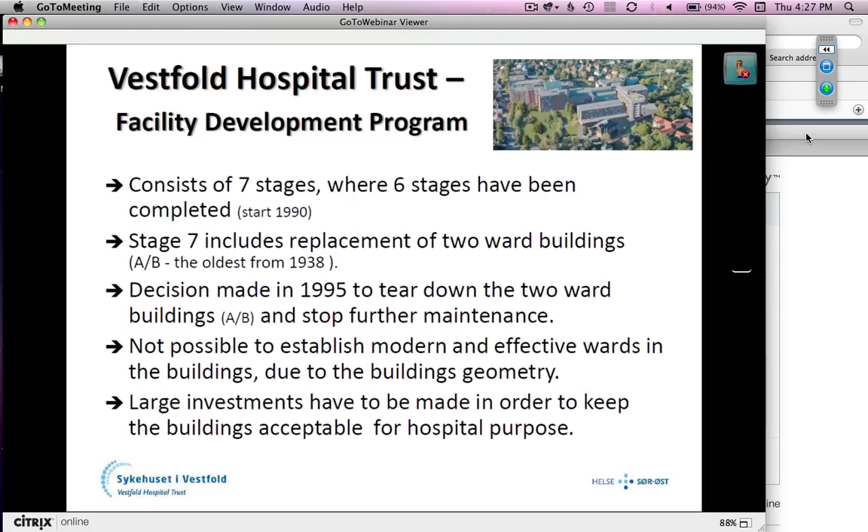A decision was made in 1995 to tear down the 2 ward buildings and stop further maintenance. It was not possible to establish modern and effective wards in the buildings due to the building geometry. Large investments would have to be made in order to keep the buildings acceptable for hospital purposes.

Here you can see the 2 buildings, which are our greatest concern at the moment. Building A was built in 1972 and Building B in 1938. Building A was built as a temporary building intended to last for about 10 years. Very poor quality.

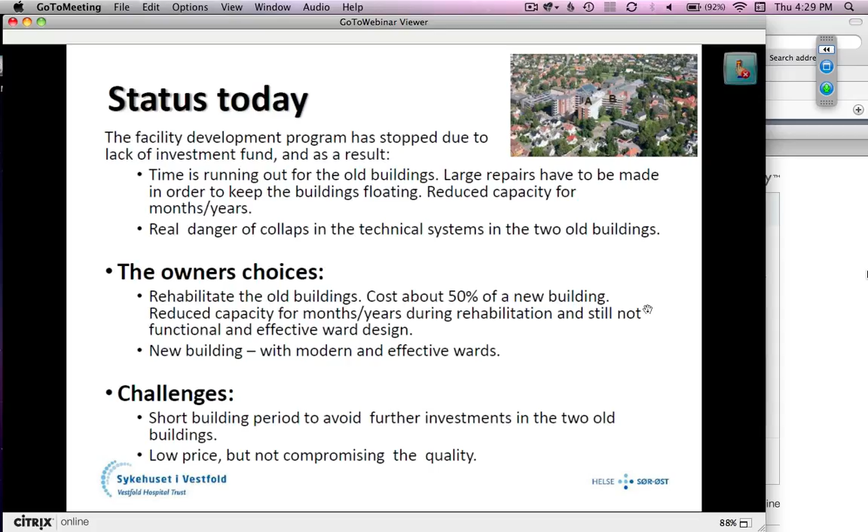Development of the hospital site has gone on for a long time, but the board of Vestfold Hospital Trust decided in June this year to divide the 7th building stage into 2 parts, where the first part shall cover the capacity of the A and B buildings. That's about 200 beds in those 2 buildings, and the board wants a solution by October this year, with the new building finished in 2013.

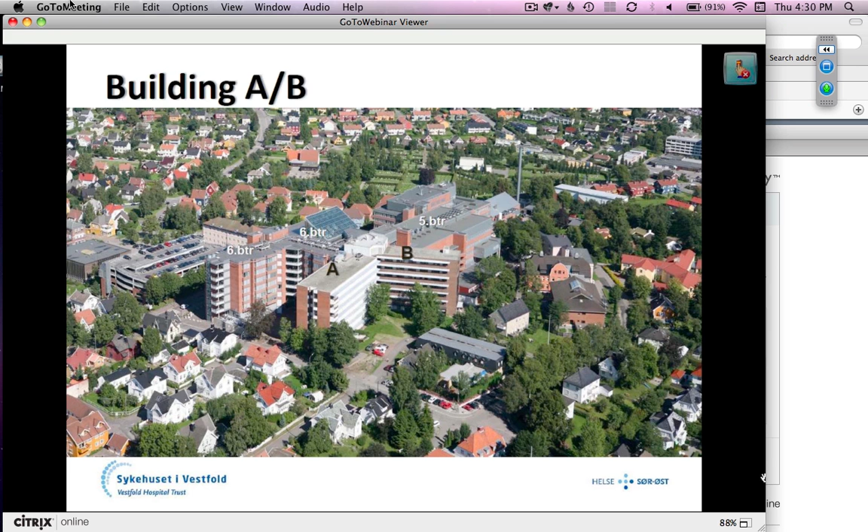This is a big challenge for us in my organization. It's an exceptionally short time to come up with a new project. We haven't got the time to involve the hospital staff in the work, and we must rely on the work done earlier in development of stage 7, and on an experienced project organization and an experienced architect.

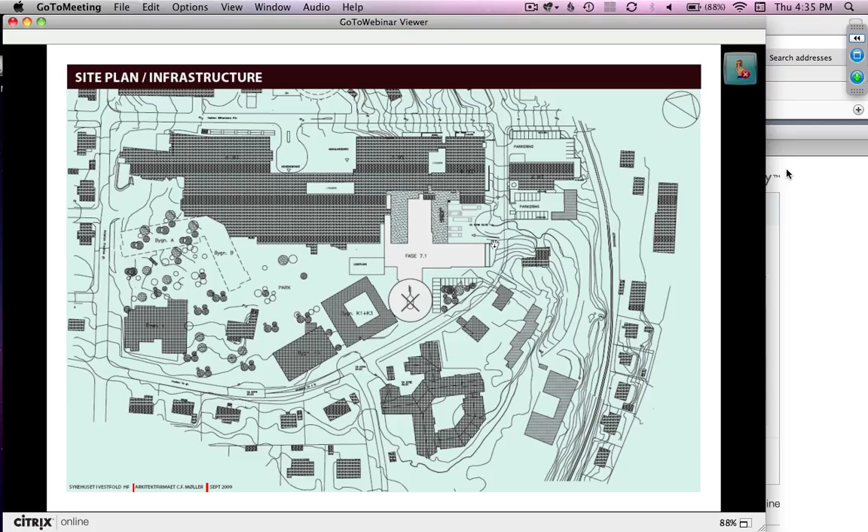So it's quite a complex situation, with a lot of surrounding buildings. And there's some loading bays and important logistics parts for the rest of the hospital that should remain operational during the construction phase.

So the way we've been working is that we've tried to make this building defined by some standard elements. Because if we can utilize standard elements, we can decrease the cost of the project, which is important for the client. So we want to achieve a high degree of standardization.

At the same time we're doing these sketches, we also make a 3D model, an IFC-based model of the same concept. And we sent that to Lars and Kimon so that they could use it as part of the Build Hospital Live event.

So we had 3 wings, the A, B, and C wings, and they're sort of interchangeable, providing a high degree of flexibility. And in sum it's 250 beds.

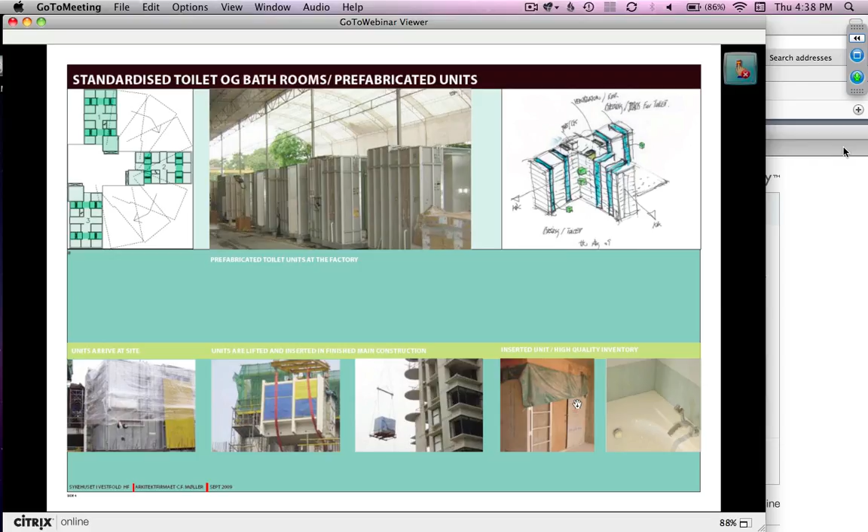Here we have made some sketches to illustrate the technical principles in this building, because the technical system is actually a key part of solving the design challenge. We have the bathroom cores, and we have some shafts where we route all the technical systems.

We have a technical subfloor, and we also have a technical floor at the top of the building. And we have the shafts, the technical shafts, as I point out. So this is the basic principle we try to deploy, and as you can see, we are trying to drive towards a very high level of standardization.

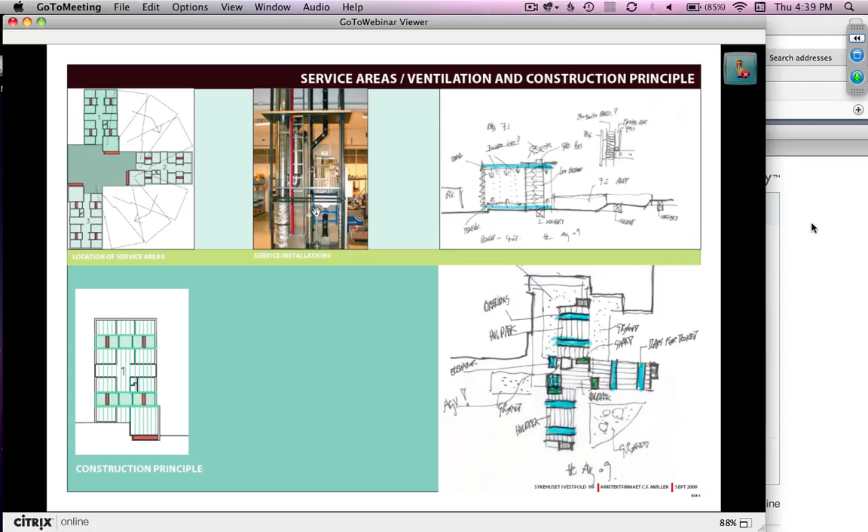When we create standard elements, it's of course important that they don't just become rigid, because we want to achieve a degree of flexibility. So the way we do that is we have a standard wing, which has a single patient and a triple patient room. So the bathroom or toilet cores are not touched, but the other parts are actually quite flexible.

And of course we have different kinds of isolation, both airborne and directly transferable, so that complicates things. This patient triple room can be refurbished or changed into another function because it's close to the shaft. We also have some pre-rooms, anti-rooms, which make us able to create isolation posts for patients, or patient isolation rooms.

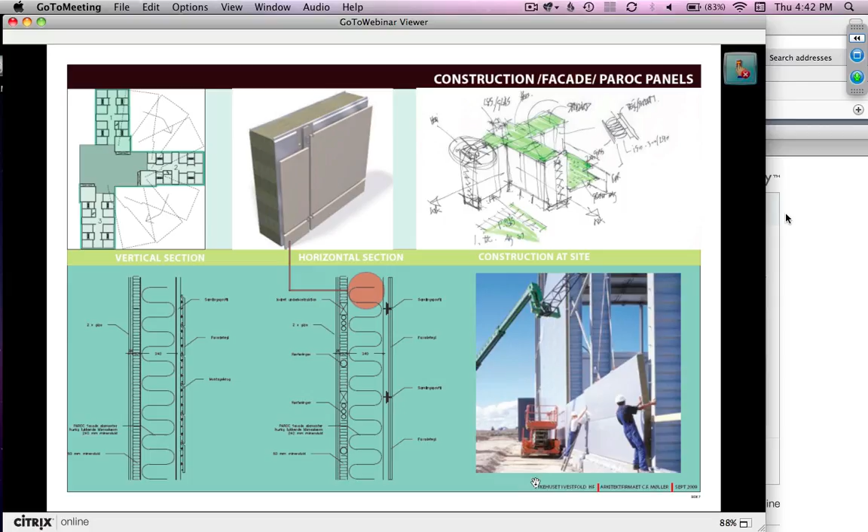And to close off the presentation, this is an example of how the final facade will look. So the existing building is brick, and we try to link to that with a new facade material. And we use some baquette tiles on this system wall, which is shielding the facade and ventilating part of it.

And this is sort of the final view of the building with the facade in place. In the further development of the project, we need to work more with the colors in the facade.

With what I've now explained, we think that we have a good angle of attack, which will reduce the cost and also the construction time for our client. And by bringing the project forward in regard to modeling, we also had the basis for doing a quick cost estimate on the project, which may be important.

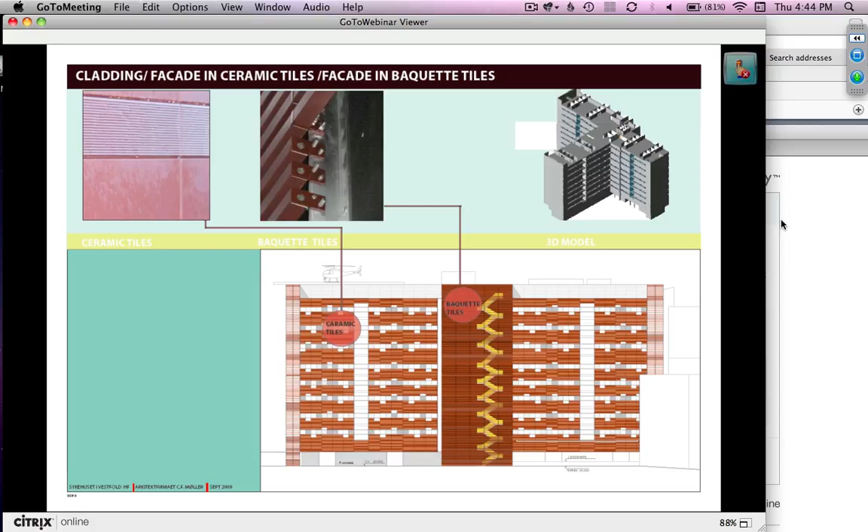Processes to be aware of, so I need to be here and there. Can you hear me? Okay.

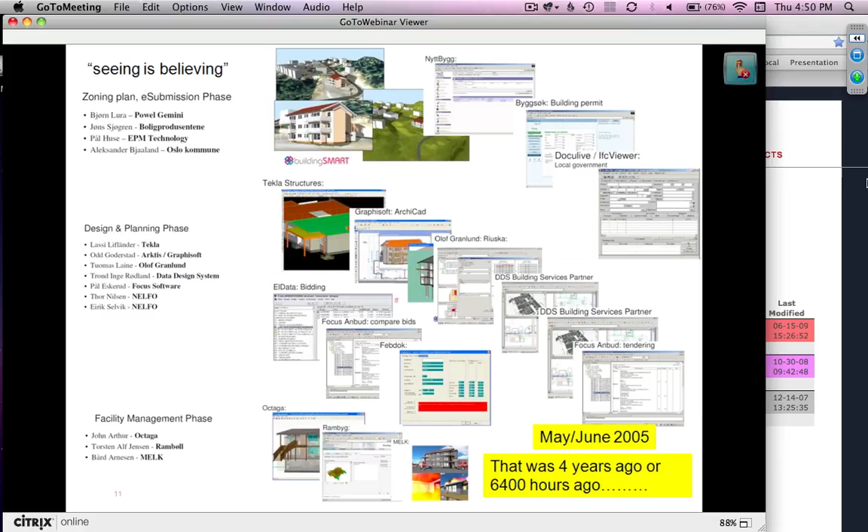In 2005 in Norway, we had a big Seeing is Believing event where we presented a lot of tools that were actually interoperating. So technically, it was possible to do these things in 2005. I think we now have more exposure and experience, and we focus much more on process issues and not so much on technology. So the technology is starting to get down.

In order to work well, we need a good process focus, and in this list from the American Institute of Architects California chapter, it says that open BIM technology is key to enable these new ways of collaborating. What we try to do with Open BIM is actually extend this curve of freedom of choice longer in the project, so that we can explore more opportunities without committing cost.

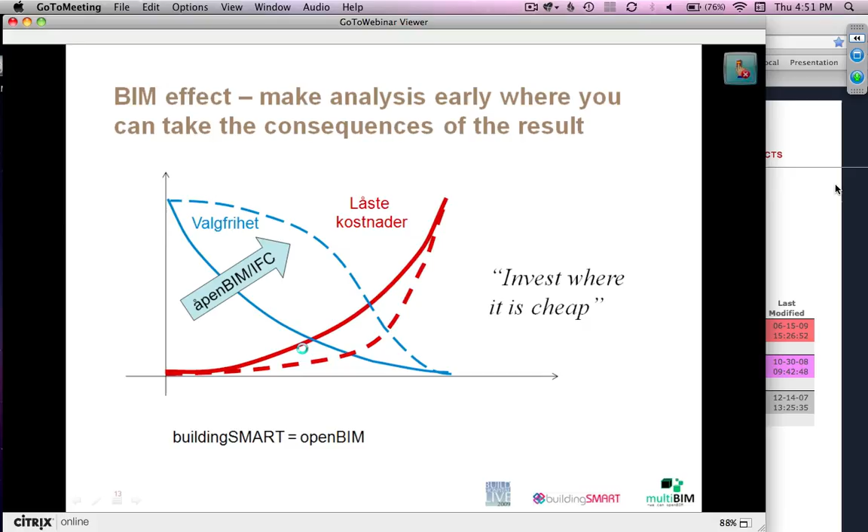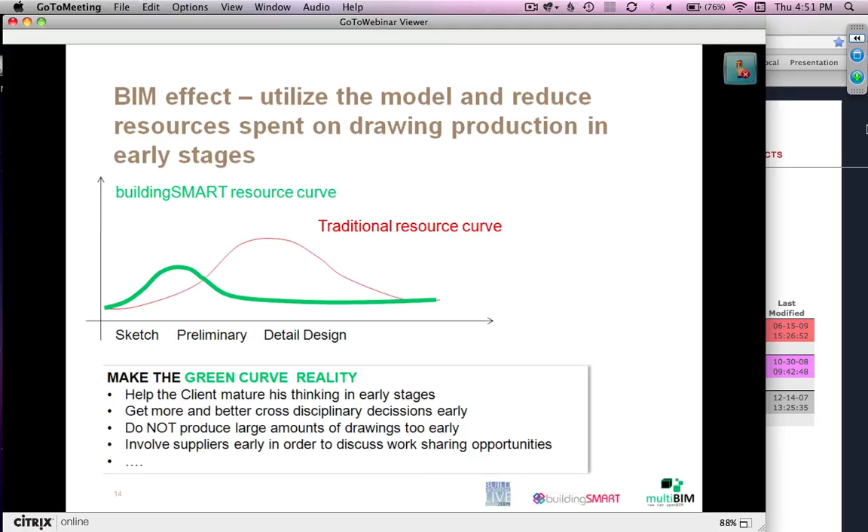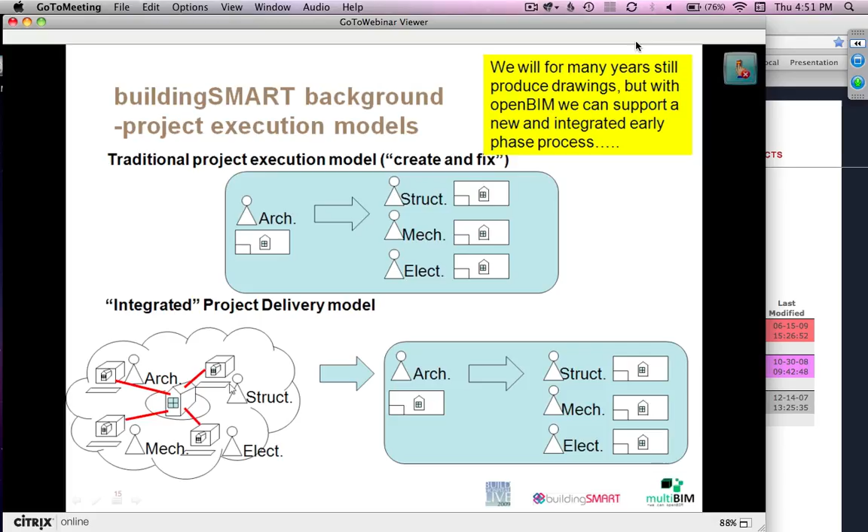This is basically what we want to achieve, and in the presentation from Kimon Onuma, we'll get some examples about how we can do things at a very low cost in the early stage, where it may matter. The key thing is that we're not taking away the traditional document production, but adding another element in the early stage where people are working with specific BIMs, using Open BIM to enable collaboration.

Just to remind you about the website, the idea is that we have tried to simplify project execution into 3 distinct steps. The first one is focusing on space planning.

As we heard earlier today, there's also functional planning based on demographic data in an area. The second stage is concept resolution, where we involve the structural guys, electrical, MEP, and so on, to develop the concepts based on the needs to be fulfilled by the functional specification given in the space layout.

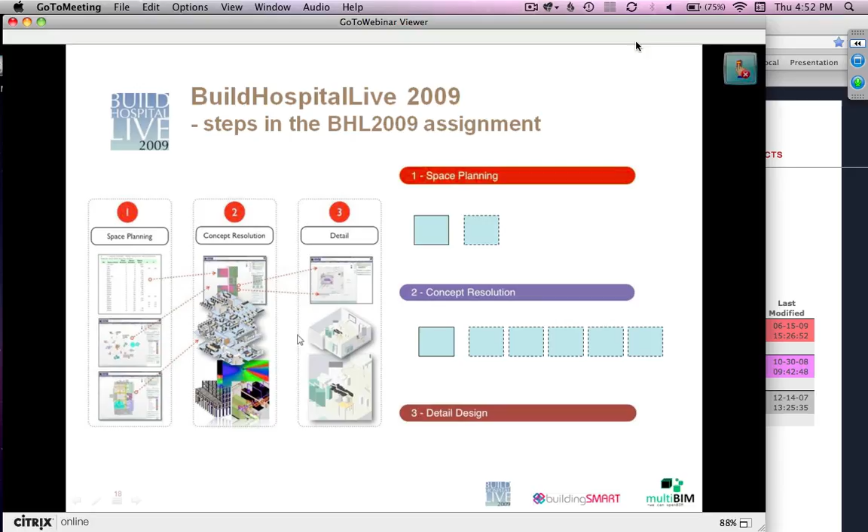Level 3 is actually to highlight that these models can be developed to a very high level of granularity. This is more a demonstration step, because we wanted to show people that you can work from a high level of abstraction to an intermediate to a very detailed level, even in an early stage, because these are the cost carriers, and if you're going to make a cost estimate, it's important to have those also in the equation.

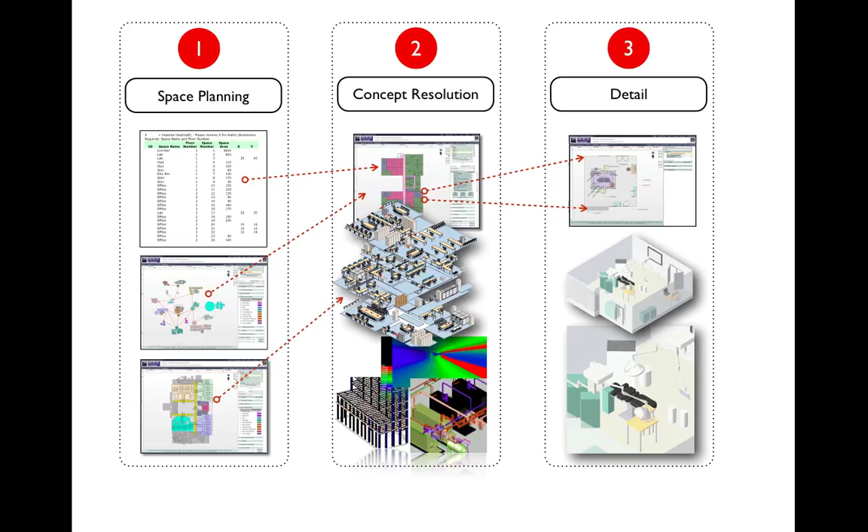Some of the results - we actually identified specific tasks along the way. We numbered them 1.1, 1.2, 1.3, so there's a whole laundry list of about 30 things participants could be involved with. The result of this is that we're actually going to be sending out certificates to teams that did different parts of this, saying, this is a piece that you did.

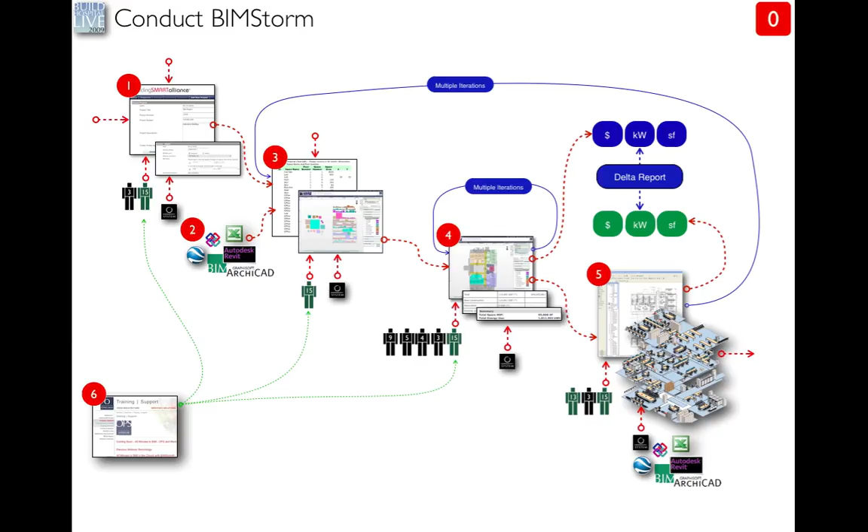And we've kind of formalized those workflows and tried to show the inputs and outputs. So if I'm doing early design, how do I pass that requirement to an architectural team to do the more detailed design, and so on. There was a series of these diagrams, and we'll actually be posting these on the web as well.

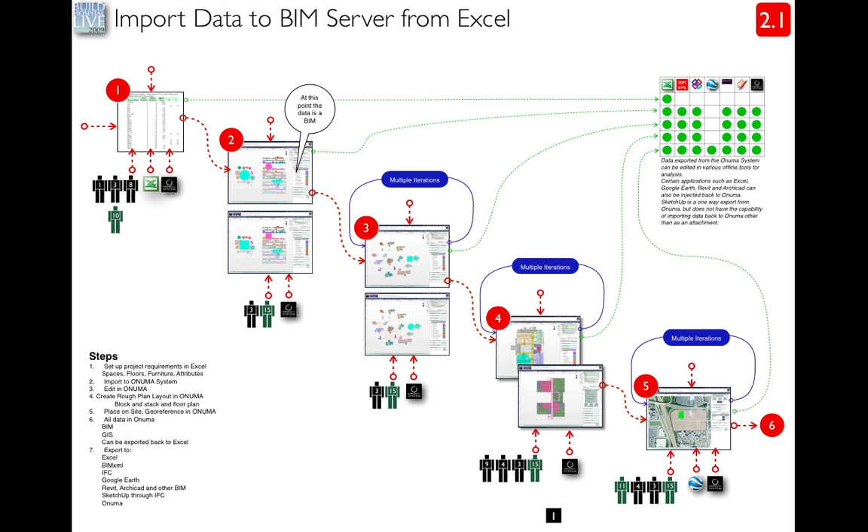Okay, so this was the basic schedule. From about June or so, we started preparing the material. There was a lot of research and talking and looking at different options for different sites and collecting information. That happened until literally September 21st. On September 22nd we started, actually even before the 21st we allowed teams to come in and start practicing. Then on the 22nd we submitted the final requirements of the project, and the team started going.

So this is just from a few days ago. Each day it started growing into a collection of teams and experiences and things they collaborated on, until yesterday, the 23rd, where we had quite a bit going on. I'll go over each of these points in more detail - there's a little tiny graphic here, but I'll be zooming in.

So the first phase was the startup phase. We started, again, what I presented earlier today - we wanted to make this live, so it was on the internet.

So a lot of the material was live on the web, in model servers and in online systems, Google Docs, and all kinds of things on the web, using Skype, using all the tools that are available on the web, including BIM, to be able to collaborate.

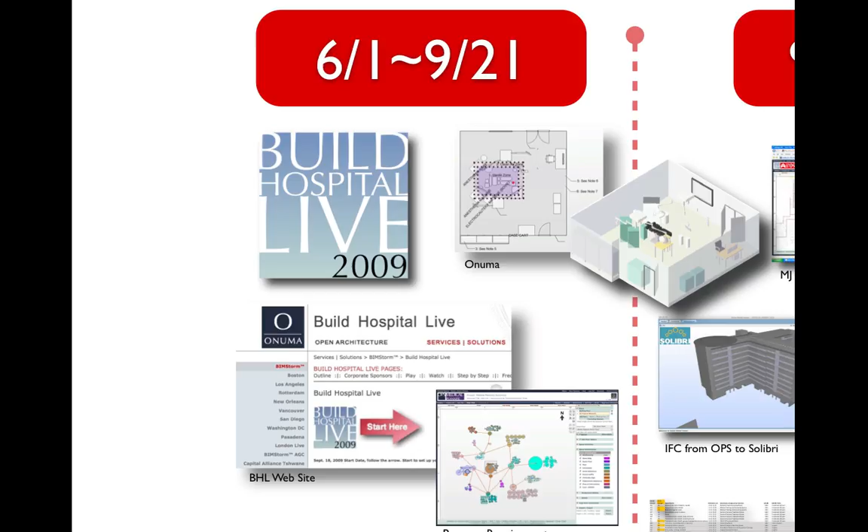So we set up the program requirements. That's what you see in the little round bubbles there - a bubble diagram of functional requirements, assuming that the plan is not done. We're saying, okay, if we strip away the actual final layout and say, what is the requirement of this hospital, that's what it would look like. And that was placed on the web.

And then the teams were given access to that, and we started to refine it. So it was on the web. One of the tools is our tools, the Onuma system, Google Earth, going from Onuma system into Google Earth, visualizing the blocking and stacking early on and making sure how it fits together.

And then we even went through as a team, before we submitted it to the public and to other teams, we tried to mimic the entire process. And our solutions weren't complete. We kind of went quite a bit, and we actually even created plans from early diagrams going into Revit, going into ArchiCAD, going to other BIM applications, and then to make sure that the steps made sense.

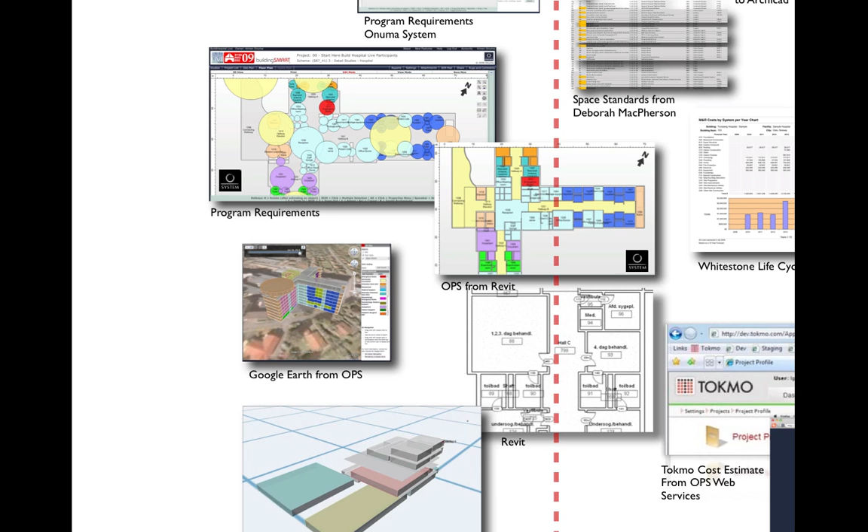Then when we opened it up to the teams on the 22nd, here's what happened. We had one team - I'm going to go through. Some of these are kind of random, but there's pretty much an order of what happened on that day.

MJ Medical out of the United Kingdom came in and they saw that there was an emergency room floor. They were only interested in the emergency room. They didn't care about the rest of the hospital. They were very focused on, we want to plan this emergency room. So they actually stripped away the plan and pulled the rooms out of the basic shape of the building we had. We said, if you want to follow that shape, that's fine. If not, you could try something different.

But they decided to follow the shape and make a proposal of different emergency room equipment. And they actually even created more detailed plans and a full-blown, like a 50-page document of all the pieces of equipment that would go into those rooms. They went to quite a bit of detail.

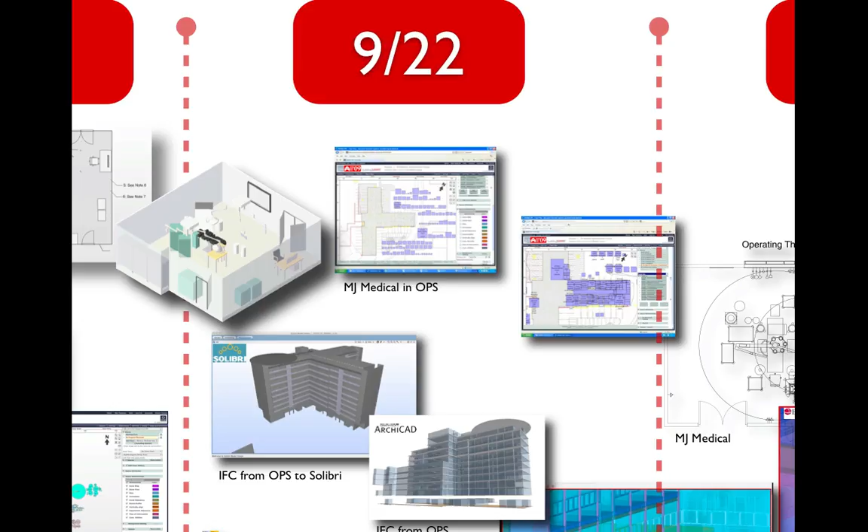And they actually then bumped into another team that was working on it from a different perspective - it was Gehry Technologies out of Los Angeles, and I'll be hitting them later on. But as you're seeing here, the other models - we were using Solibri to pull IFC files out to see how the building was looking, ArchiCAD. So it's that random pattern that Lars was showing in the beginning. There was a lot of things going on. They were starting to coalesce and come together.

And the IFC model then from the Onuma system was pulled out into other applications, for example, in Solibri to look at. IFC went out to Tekla along with some CAD files, so there was a full-blown Tekla model that was created that was presented yesterday for the first time. I was pretty blown away by the level of detail. They actually went in and did quite a bit of detail from the EDR group using Tekla.

Another group, Deborah MacPherson out of Washington, D.C., was interested in space standards. So she was looking at omni-class and classification of spaces. I don't believe she did any actual layout of plans.

And please correct me, the audience that's online, please realize that we're digesting this even from a few minutes ago. I'm collecting data as it's coming in online. So it's still - things are happening while I'm presenting here.

Whitestone Research is a group out of Santa Barbara that said, okay, we see a model for a hospital coming in. Our specialty is to give reports on life cycle costs of maintaining that type of a building. So they submitted a report and pushed it up to the server so others can access it, saying here's the cost of maintaining the equipment in the building for 20 or 30 years, how much it's going to cost to wash the windows, what your taxes are. So they have historical cost data that they start applying to the building.

And the most interesting thing about Whitestone is most of their work in the past has been going into existing buildings and giving guidance to the owners about what their facility is going to be about. But here they're actually giving us input while the building is being designed to help us make better decisions about what kind of design we want.

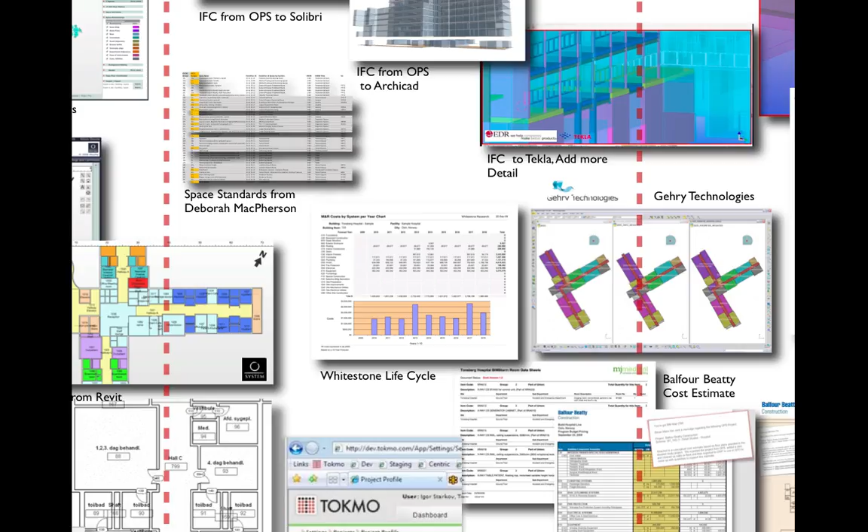That was Whitestone Research. Tokmo from Washington, D.C. is a cost estimating tool on the web, in the cloud, and they're connected to our system, Onuma, through web services. Their tools are on the web, we're on the web, and they can pull quantities as we're making the design and give an early cost estimate that you can continue to refine and make decisions on the different implications of the design.

Michael Scarmack from Food for Thought took the model and started doing visualizations of different types of energy—I think it was energy use and airflows. So data driving graphics, just like what Rolf was showing earlier about how you can visualize things. If it's dynamic data, you can push it into the model and say, what does that look like? Let's change it—what does it look like again?

That's what that Google Earth view is about. We use Google Earth a lot because it makes the model accessible to a lot more users, a lot more participants—you're not required to use complex tools. So this is an example of how it was used for that.

Balfour Beatty actually started doing a more detailed cost estimate—let's go back a little bit. They took the IFC model, did analysis in their tools, and submitted a more detailed cost estimate. So there were two parallel tracks: cost estimating from Balfour Beatty and another from Tokmo.

It's actually okay to have different types of analysis being done. And obviously, with this project having so many teams—a real project would only have 3 or 4 teams—here we have many teams working at the same time.

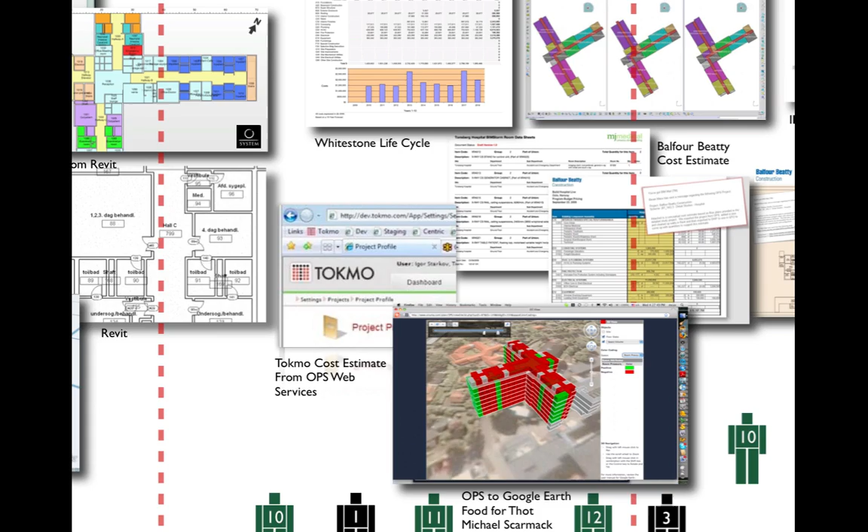So as we move on to the next day—this was yesterday, no wait, this was the day before. Now we'll go into yesterday. Yesterday we started seeing more postings from MJ Medical with a more detailed layout of equipment, including that long equipment list.

We had the Ecotect team from Autodesk taking the model and doing different types of energy analysis, showing it to us live. Unfortunately I don't have an animation to show today, but they were spinning around and doing different types of analysis with that.

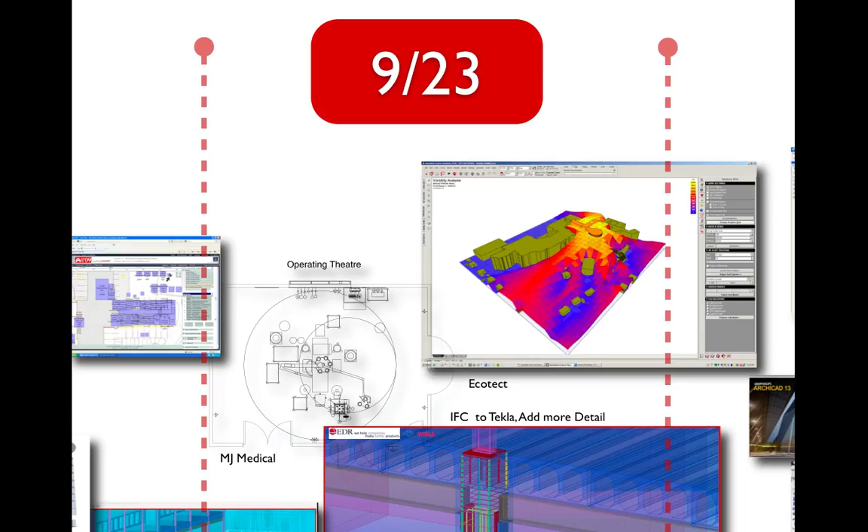The Tekla model from the EDR team—here's one of the details of a piece of the building, a connection they were analyzing, but they had a full-blown Tekla model. They presented yesterday morning, though we didn't get their IFC file until the afternoon.

There's an interesting side story about that, because this was one group that was not connected to the web live. So when they were presenting, their model wasn't available on the web, and others couldn't grab it until the afternoon. That's a lesson learned—if we have live connections, you don't have to negotiate and waste a day. That's something we'll apply as we head into Washington, D.C.

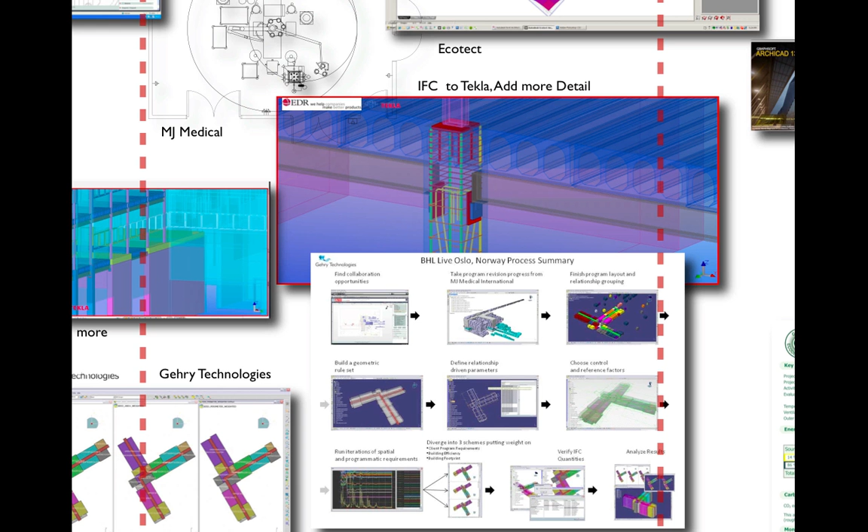Gehry Technologies went through some quite detailed studies. They took the model MJ Medical was using for analysis, along with the model already completed from the initial prep work we had done, and went through a series of steps—I'm not entirely sure exactly what I can tell from here, and they haven't posted a lot of details about what exactly this is.

So they used the Onuma system, took IFC out into Gehry's tech tool, and did a program analysis in their tool, similar to what other tools are doing, including ours, but from a different angle again, which is great. So you're seeing color-coded spaces.

They're building geometric rule sets with parametric relationships, looking at controls and reference factors, and running iterations of spatial and programmatic requirement compliance. I believe that's what the chart is there for, to develop 3 schemes. So this is kind of a rapid analysis.

Let's analyze it and look at the 3 schemes, verifying quantities with IFC, and then analyzing the results. I believe they went through iterations of this pretty quickly. All of a sudden, at the end of the day, we saw these graphics coming in from Gehry Technologies, so that was really great to see.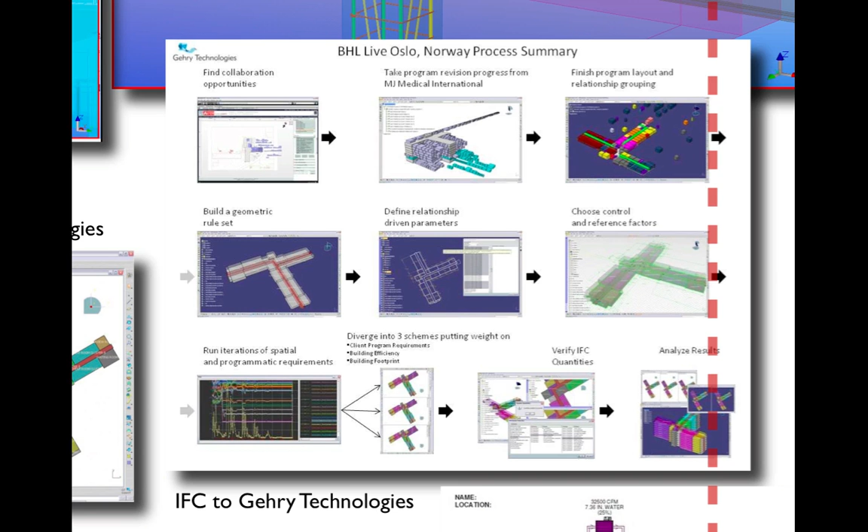Another side note is Gehry did actually talk to Balfour Beatty, so these were relationships forming as things were happening. Balfour Beatty was watching and said, okay, we see Gehry is doing some work with the model, we want to start giving them guidance on construction and cost estimating from a contractor's point of view. So their engineering group started looking at mechanical and electrical systems, and they have almost 40 pages of diagrams about different systems that could go into the building. Again, that's BIM from a different perspective.

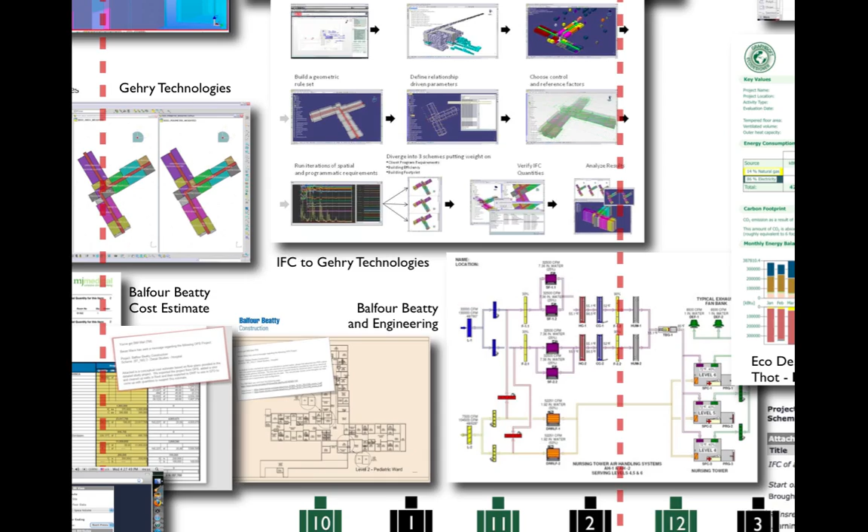That was last night. So we had the Tekla model, the IFC model, the ArchiCAD model, and a Revit model. Last night about 8 o'clock, I was online and noticed a team working in ArchiCAD 13. The new version of ArchiCAD 13 has a live model server, and they were just starting to learn how to use it. I said, why don't you take the IFC model and put it into the ArchiCAD model and put it on the web?

And that's exactly what they did. They took the model from the IFC, from the Onuma system, and the IFC model from Tekla because now it was posted online. They pulled it into ArchiCAD and started collaborating with people around the world in another kind of model server sphere, looking at curtain wall systems and chatting online through the model. Very interesting example. It was just a few hours of work, so not a complete solution, but it was the beginnings of what can happen if you want to get a different perspective. Here's the Tekla IFC model that was brought into ArchiCAD.

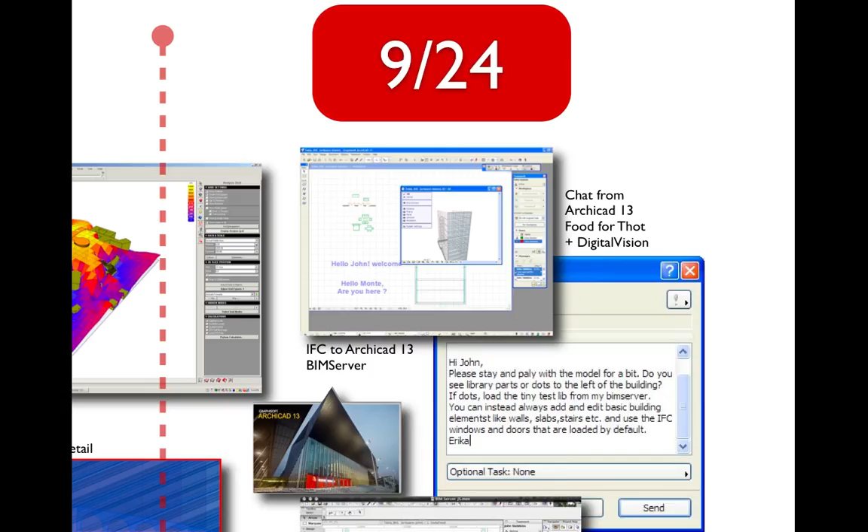Another group was the Food for Thot team, which has actually won several BIMStorm awards. They're a team spread all over the U.S., very small, 1 or 2 person offices, and some larger, like 50-person offices. They were collaborating to create new teams. This goes back to this morning's discussion that you don't have to be a large firm to be able to collaborate and work like this.

So this is the Food for Thot team. They actually created a PowerPoint slide describing their process, and that's already posted on Google Docs. One other team from Food for Thot did an energy balance evaluation using Graphisoft's Eco Designer, doing carbon footprint analysis on those designs, and then also taking it into other applications.

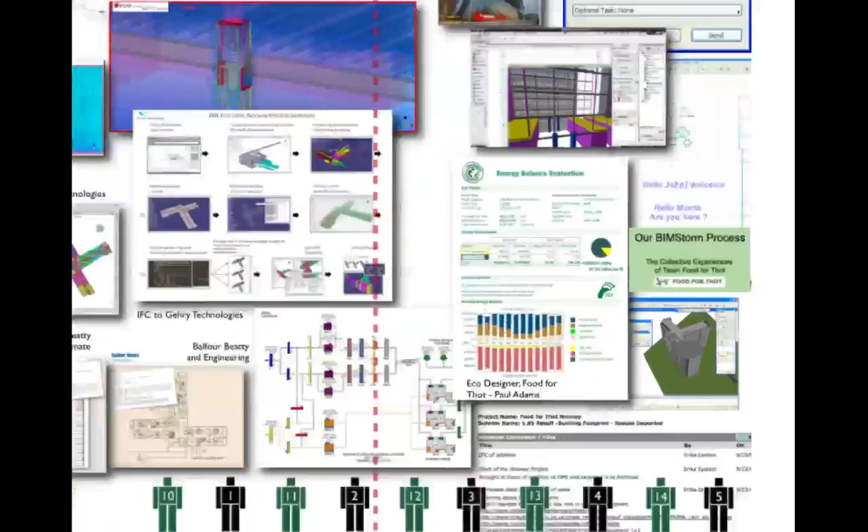The Food for Thot team, on the lower right, also did a lot of chatting through the model in the Onuma system, using the model to channel communication rather than having emails and other files attached. So this is just a glimpse, not everything that happened. There's a lot more material online and we're still digesting it. We're going to have a review again in a week or 2 with the other teams, and I want to thank everybody online who participated.

Lars, is there anything else you think I should show? Or are we done time-wise?

One more point. Actually, right before I came up here, there was an email from CSI that said, we see that you're working on hospitals, we're working on OmniClass for hospitals, here's the latest OmniClass table. So we're drawing reaction from the industry by doing this, by exposing this and being transparent about it.

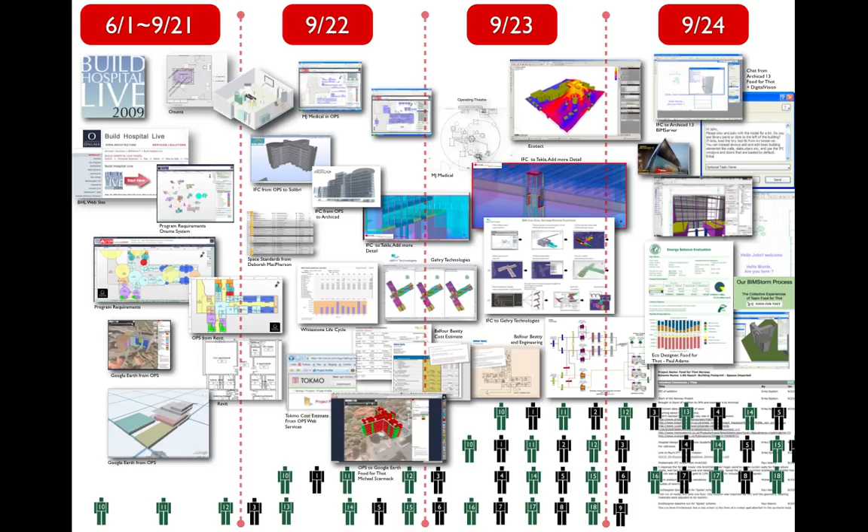We have an avalanche.